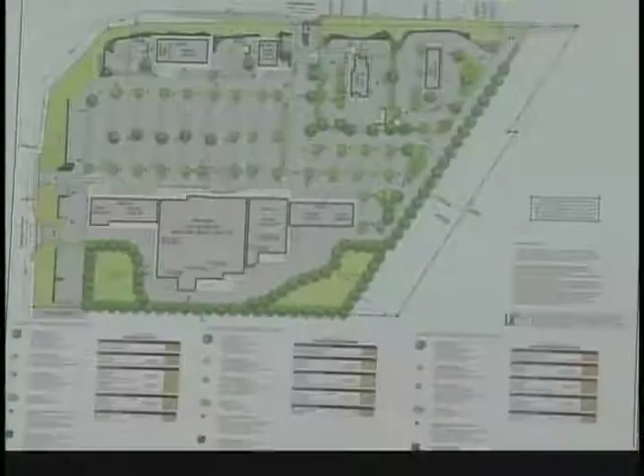All the parking lots, the majority of the parking lots, all the landscaping on the exterior, that's all still going to be phase one? That would all be phase one, yes. Sorry to interrupt — some of the landscaping within those pads would lag based on what those pads actually end up being. But the exterior landscaping, all the trees that buffer it to the north, the retention ponds, obviously we'd have to put in the trees around it — everything on Ham Reed and Nelson would go in, as well as the parking lot and all associated landscaping.

One last question for you, since you brought it up — you talk about building a lot on the west side of the United States, and I know their zoning requirements are quite heavy in a lot of those places, but you do manage to build in those places, correct? With the strict regulations and all that, so we don't have to worry about this falling apart on our discussion tonight. I mean, trying to get this right. Yeah, no, absolutely. Okay.

No, and quite honestly, we want to build a project that you guys are happy with. It doesn't behoove us to come in here and jam something down your throats and no one's happy with it. There's an economic reality we have to live with, but we're open to discussion on whatever you guys want to talk about, architecturally, landscaping, all that.

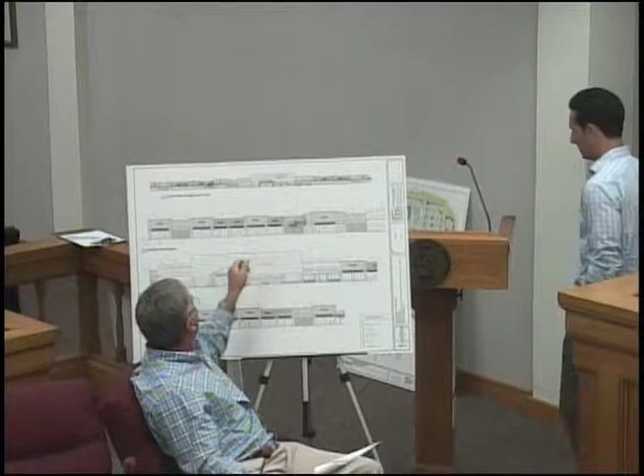Which is nice—he has a lot of glazing on the front with fixtures. This has more of a contemporary feel to it. If he maintains that style, and if y'all are okay with that, I'm okay with that too.

Again, there's no pitched roof here, but the buildings across the street do have some roofing material that's pitched. It didn't meet the ordinance, as you know, so they had to get a variance for that—but they do have some asphalt shingle type roofing, it's not all flat. So whether they can incorporate that into these other out parcel buildings, since they're smaller, it's hard to make that work here. I understand that. But in those smaller out parcel buildings, maybe you can get some of that. I just don't know.

I think the potential is definitely there. Yeah, it's like Jason's saying, if it's more of a...

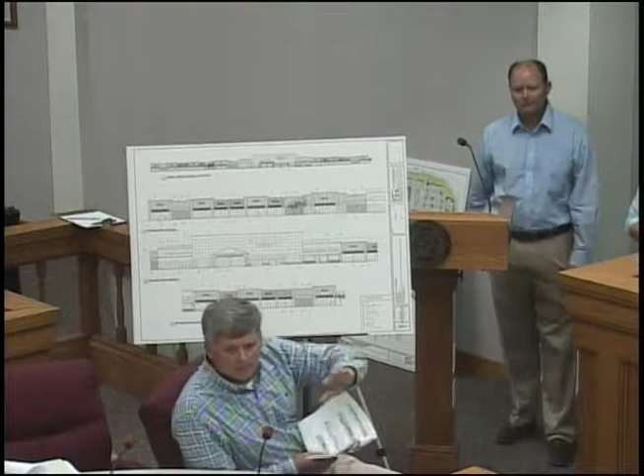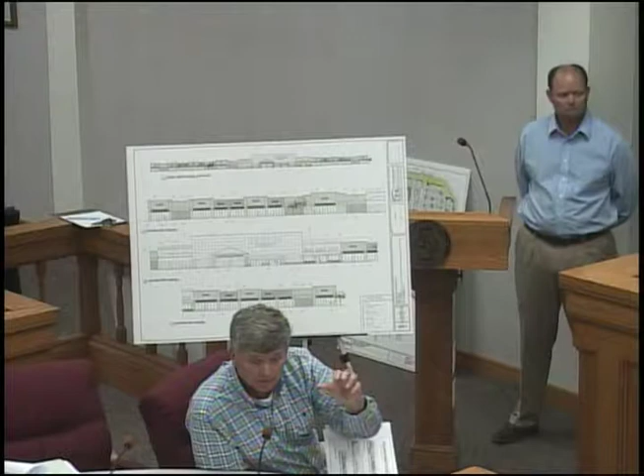Once we know what some of these uses are, we can come up with schematics like this that we know you guys will be happy with. Mr. Scott, I'm comfortable with them coming up with those kinds of schematics to see if they can bring in some of those components within the ordinance, along with some sort of material board that they would show. We're good with that.

So the motion that I made, as long as you're comfortable with what they're saying - that motion pretty much says planning and development keep the integrity, that's all, I didn't get specific. So if you're comfortable with what they're saying, just say so, because that's what you just told me, Mr. Scott, so that's what I want to hear. I like somebody to be confident when you tell me something. I'm like, you got it, awesome, yes.

Let me see what Ms. Wallace has to say. Go ahead. I was just going to suggest that we add on that he has the authority to kick it over to you if he feels it's ultimately something you guys need to approve - the kick-the-can motion. If he feels like it's out of his bounds, or if they're not doing it, I'm gonna kick it.

Mr. Porsche. I just want to make the comment that I think specifying the exterior materials would make me feel comfortable. Just in driving through other cities with very high restrictions in similar areas, you see different architectural styles.

But as long as they're complementing the other development across the street, I think it's possible to incorporate some details of the French provincial. But for me, I don't feel it's absolutely necessary for that verbiage to be in our decision. As long as it complements and it's a great-looking building using similar materials, it's okay that it's not an exact architectural match for me.

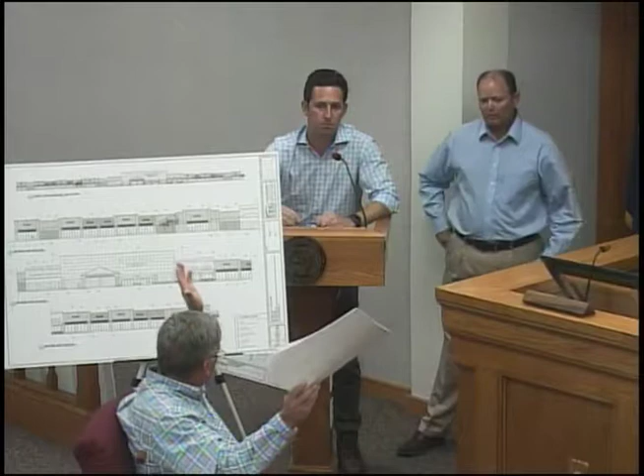We can do a sightline study at that time. And it may be that, because at this point in time, the actual heights of these buildings is not determined based on the use. Some of them may be deeper than others.

I guess at this point in time, we're not sure what some of these uses are. The depths of these buildings may be different, so that changes the height. So what we can do is a sightline study at that time and show you exactly what would be visible based on what the tenant makeup is.

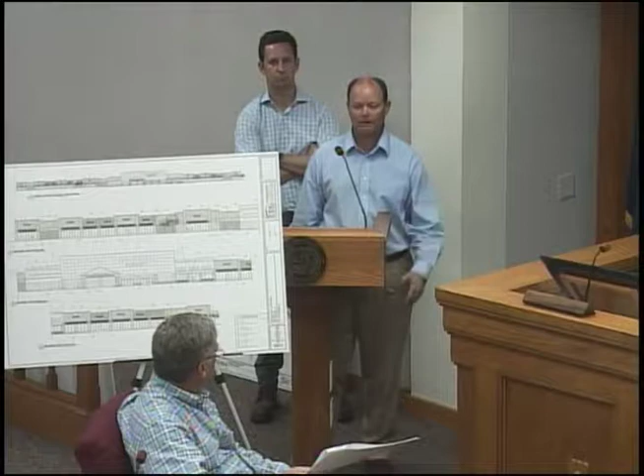And again, it may be something, depending on their sightline study, that it's limited screening that you have to do to bring the parapet up, or something like that, and I think that would be an acceptable way to handle that.

Well, I know it's in the ordinance, so it's pretty clear. So as long as anything that's visible is dealt with, we dealt with it on the other project. Okay, thank you, Mr. Chairman.

Any other members have any other concerns or questions? Discussion? Jennifer, are we done with all the bullets, or are we going back to them? Okay, yeah, try to get us done.

So we discussed the architectural theme, roof pitch, roofing material, the walkways, that crosswalks be painted or striped. The ordinance calls for, I believe, alternate materials, pavers, things like that. And that a canopy be over the main entrance of the anchor building only, which, if you recall, the intent of the ordinance was more for medical facilities where you may have the covered walkway for people in wheelchairs. Well, now that this is a different facility, they're just asking for the covered canopy right there at the anchor, the grocery store.

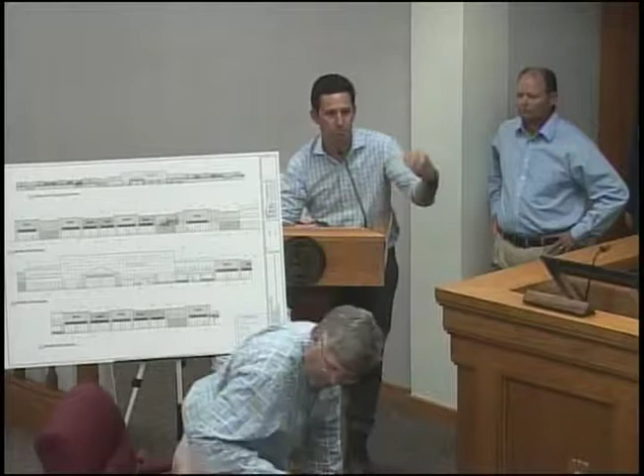What else, Jennifer? I hate to ask you to repeat that last, but you said like about 6 different things. I know, write it down.

Walkways, crosswalks painted or striped. Yeah, the walkways, which I'm sure that's to try to cut costs, but obviously a walkway that has brick or paver, that's across the parking lot areas. Yes, so we're talking about in the parking lot? Yes. Well, yeah, that would probably be kind of extreme. I guess they don't need to do that.

So anywhere there's a crosswalk, here, here, those would be painted instead of brick. I don't know what you think about that. You look excited. Paint them like brick. Yeah, paint them like brick. How about that? Crosswalks in the parking lots. Or the bricklayer's gonna go out of business. You stamp it.

And what was the other piece? Crosswalks, weather protection to extend to the parking area, signage, wall signs on the lease space, and then the lighting. Okay, and the last bullet is the landscape, but we'll finish this one before we move on.